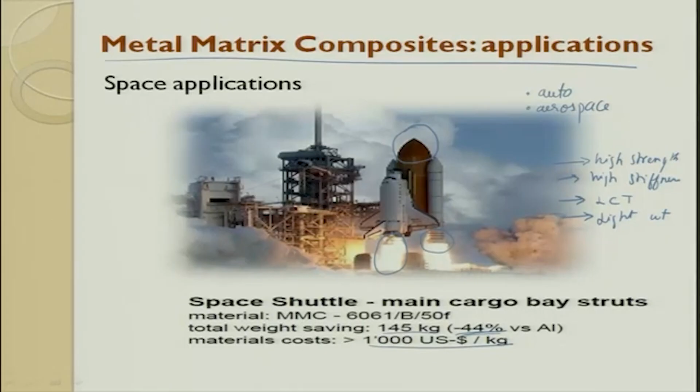Next is the automobile industry. The automobile industry had a huge impact for a common man, because fuel efficiency is one, and then they also try to enhance the stiffness. So the moment the stiffness enhances, during an accident or crash, these materials try to yield and transfer energy such that the passenger is slightly safe.

So the brake drum is made out of metal matrix composite. Earlier it was made out of cast iron, now it is made out of metal matrix composite. Wheel rim: titanium rims are coming up today with metal matrix composite, and then you have the piston, which has been there for a long time, made out of metal matrix composite. They make it through a process called stir casting, which we will see later among the different processes.

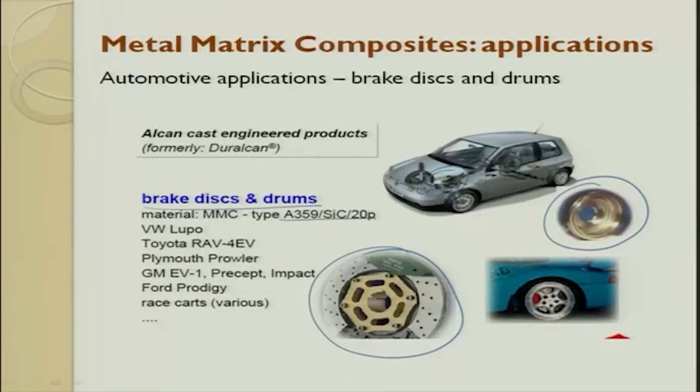So basically if you can make a casting from a metal alloy, then all these things can also be made through metal matrix composites. So brake drum and brake disc was a big advantage. There we used aluminum reinforced with SiC particles. This is used in the Toyota car company, and all the major giants started pushing very hard. So the engine is now made lighter, the silencer is made lighter. Silencers are made today out of titanium alloys, and these titanium alloys now move towards titanium composites.

The other thing is, you can see the front and rear discs. These discs are completely made out of metal matrix composite, and they are all made out of aluminum. So this is aluminum alloy, aluminum, Si and Mg. This is an alloy which we have reinforced with SiC, and it is particulate.

So the moment they do this, the disc temperature enhances. The moment the disc temperature enhances, the efficiency of braking enhances. The car weight is nowadays also reduced. The moment you reduce the car weight, the mileage goes high. Because of carbon footprint and other things, people are looking for less pollution, longer distance of travel, and safer travel.

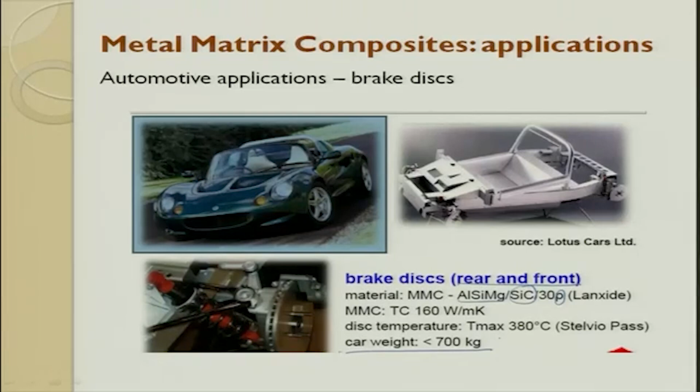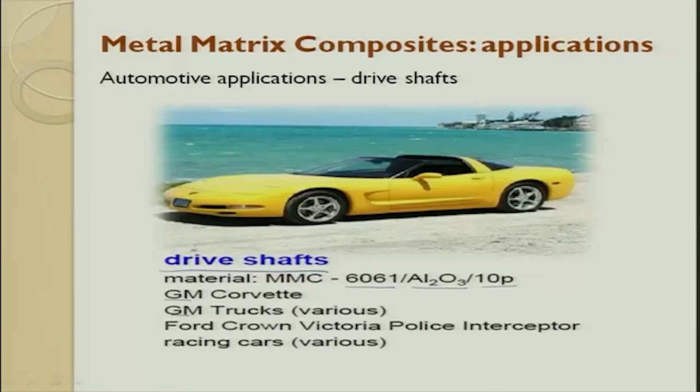So that is why composites are coming up in a very big way, and wherever there is high temperature, wherever a strength point of view or a thermal point of view comes, we replace it with metal matrix composite. Drive shafts are another big example made today out of metal matrix composite. 6061 is the alloy, reinforced with alumina particulates, and this is used by different companies; GM, Ford, all are using it for their drive shafts.

So, engine parts. This is an engine block which was earlier made out of cast iron; from there it went into aluminium. Today people are making it out of titanium, and from aluminium and titanium they are slowly getting into metal matrix composites. Here aluminium reinforced with SiC is done, aluminium reinforced with alumina is done, Ti with TiCN and TiN are also tried. They also try to reinforce with particulates or even short fibers.

The only difference is aspect ratio, length by diameter. A short fiber will have a shorter length, a long fiber a longer length. You can also try to reinforce with whiskers. So if you see here, the rest of the portion will be made out of aluminium alloy, and only the top portion will be made out of metal matrix composite.

This portion alone will be made out of metal matrix composite, wherein ceramics is reinforced. With the ceramics, they make something like a preform, and in the preform there are a lot of vent holes, or some gaps in between. Through these gaps the aluminium is pushed inside. We will see the process. When you study the process in depth, you will understand how these applications have been made.

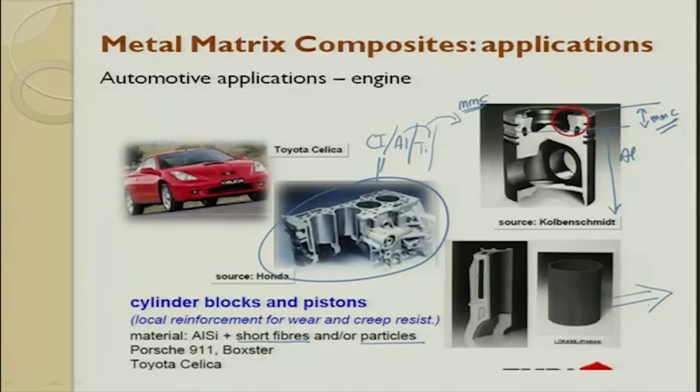This is done by squeeze casting methods. These are liners which are used. They are also made out of metal matrix composite. All the big giants, GM, Toyota, Honda, are trying to replace with metal matrix composites.

Train. In trains also, today the number of coaches has increased from 16 coaches to 24 coaches, at least in India. They are all 21 to 24 coaches, and goods trains take 50 coaches. So the biggest problem is the braking system. The moment you apply the brake, it has so much momentum, it keeps pulling for almost a kilometer and then stops.

So if you want instant braking, and discs which can withstand very high temperatures, then metal matrix composites are tried there. Braking discs and braking drums are today made out of metal matrix composite. They are made lightweight so that they can increase the mileage, and they can withstand high temperatures.

The weight of the disc is 74 kilos, which replaced cast iron. They got a weight reduction of 40%. So the total weight saving is 10 tons for a train. On successful testing, they could go over 1 million kilometers.

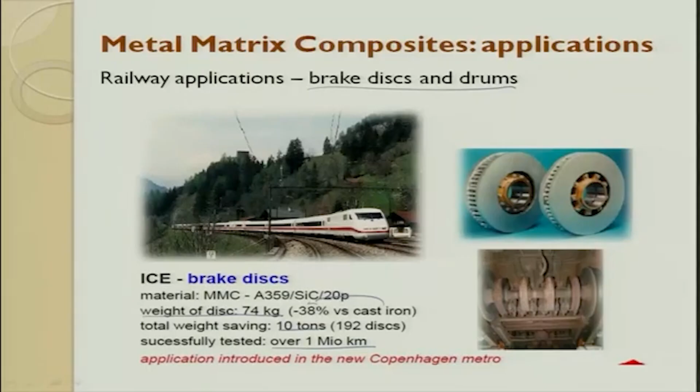In trains, railway coaches and railway engines, they are making copper based composites to withstand high temperature. Circuit breakers, which were earlier bimetallic, are now made out of copper alloys, and discs made out of aluminium are also made out of copper reinforced with graphite so that they give lubrication. All these things are now tried in a big way.

When you go to planes, wherever it was possible, 50% of the parts are now made out of metal matrix composite. They are made out of aluminium metal matrix, titanium, steel and others. These are the applications. Where do we go for titanium? Wherever you want weight reduction. But what is the biggest challenge? Why are people not going exclusively for titanium cast compared to aluminium?

Processing of titanium is difficult. Mixing titanium alloy with particulate composite without having a reaction is a big challenge, whereas with aluminium it is very easy. That is why people prefer aluminium, since its processing is easy. So aluminium is used as well as titanium. Titanium processing is a little difficult.

So if you see, at all the exits you see titanium, because at high temperature titanium is used. Wherever there is not much load, but you still need some strength, you see aluminium. These are some of the places where aluminium is used in a plane, and you can see steel is still used even now, and other composites.

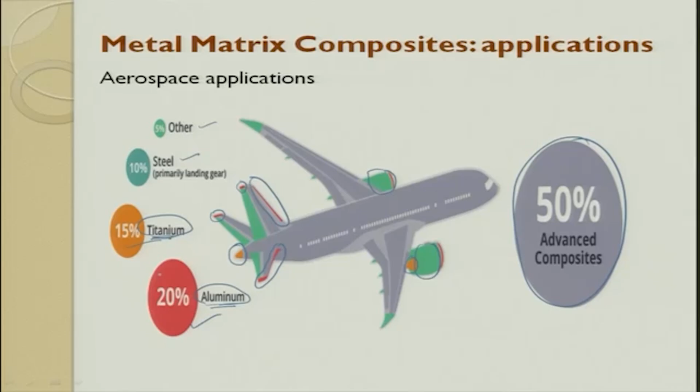Wherever there is hot exit air, they always go for titanium alloys or titanium metal matrix composites. When I say others, these are rare types of metal matrix composites which are used for particular applications. So in the aerospace industry it is also used.

Lightweight, that is why people are making it. Interestingly, whatever casting you made earlier, the same process can be used, but keep in mind that you are adding to the alloy some reinforcement which is lighter weight, so there will be a difference in density. Make sure it is homogeneously distributed, or if you want functionally graded, that is also possible. Functionally graded means the property changes with respect to distance.

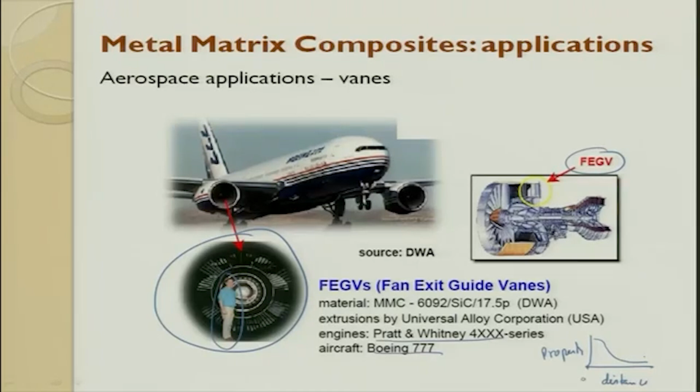So here you see the manufacturer I have given clearly, and what are the candidate components, and then what are the benefits we get. You see weight savings, and higher operating temperature you always get.

Same way with advanced fighters, you can see the life cycle cost savings. You reduce the weight of the component and start saving fuel, and try to find out a break even, when you get back whatever investment you have made. That is what life cycle cost savings means, and you can see it in gas turbine engines in a big way.

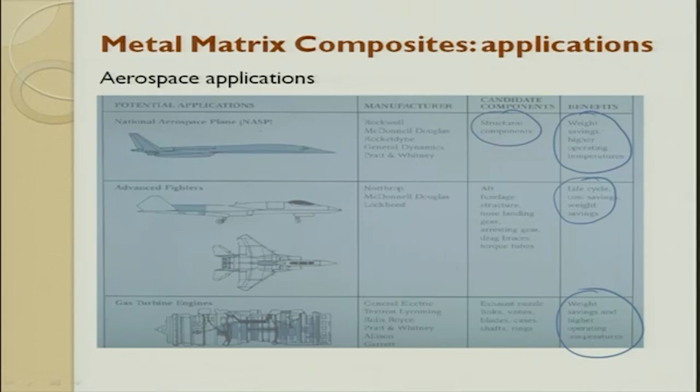So the weight savings, and you can go for higher temperature. When you can go for higher operating temperatures, you have better combustion happening.

This is pretty interesting. These are electrical conducting cables for power transmission, which I introduced in the previous class. If you see, there are a number of small wires tied inside, and then they put a sleeve on top of it. These are transmission towers and wires which run for several kilometers.

In order to avoid the wire getting sagged, we support it at several points. Each supporting point is made out of a tower, which is a huge investment cost. It occupies land and a huge investment to make these structures, and whenever there is a natural disaster, these structures are prone to failure, and relaying them back takes a lot of time. That is why people have nowadays gone for underground cables.

They are not going for overhanging cables, they are all going for underground cables. So that has its plus and minus.

Coming to this cable, initially these cables were made out of conducting material like copper, aluminum and other things, but they figured out that as the load on these, meaning the drawing power, goes higher and higher, these materials start sagging. In order to avoid this sagging, you have to add more and more towers.

Now, with the coming of metal matrix composites made out of aluminum, the density went down drastically, the coefficient of expansion went down drastically, the conductivity enhanced significantly, and now the number of towers are reduced and they have transmission of power with lesser losses, which is a big boon for the power transmission industry.

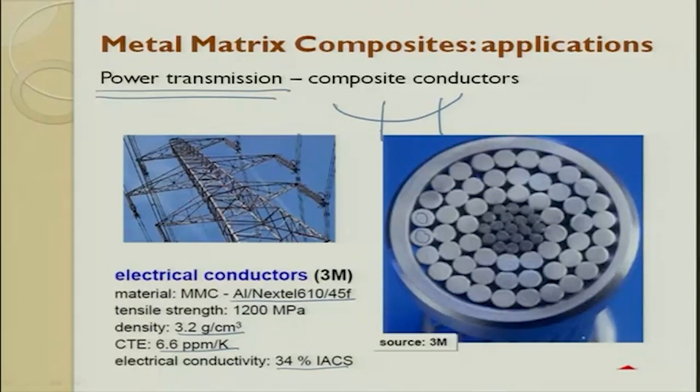Gas turbines can be used in aerospace, and in the marine industry. I have already dealt with these. The advantages are: high strength, low weight, ability to perform at high temperature, which make metal matrix composite the material of choice for gas turbine engine components.

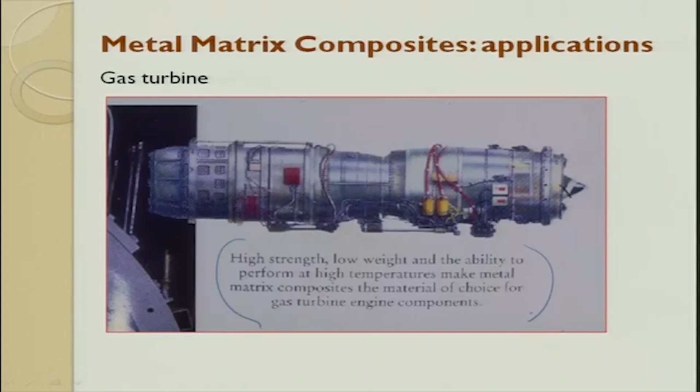If you see the market forecasts, in ground transportation which earlier was 1,600 tons, it has gone up to 3,400 tons. Thermal management went from 668 to 1000, and aerospace and defense increased as well. Industrial and recreation went from 152 to 220. In 1999, 2.5 million kilos were used, and in 2004 it has gone to 4.9, and by 2014 it has increased further.

So now they are finding a lot of applications for metal matrix composites in the transportation industry, predominantly for thermal management.

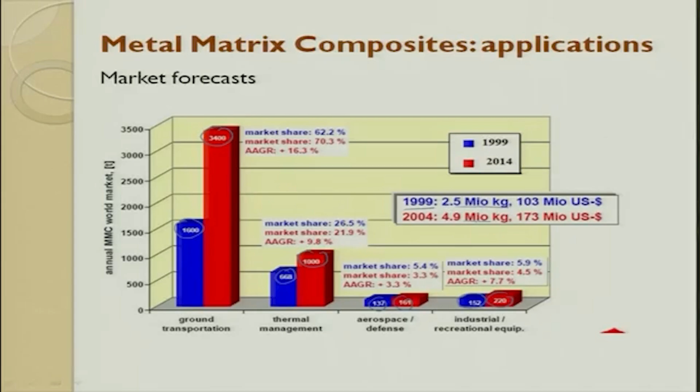With this we come to an end of the lecture, wherein we have seen a lot of applications, and we have seen the introduction of metal matrix composites. I have given enough basic knowledge for you to appreciate metal matrix composites.

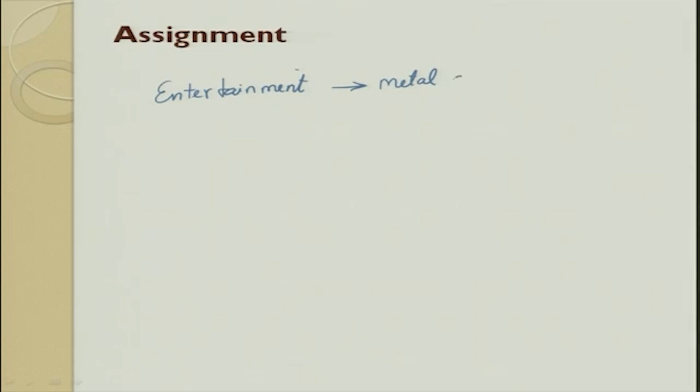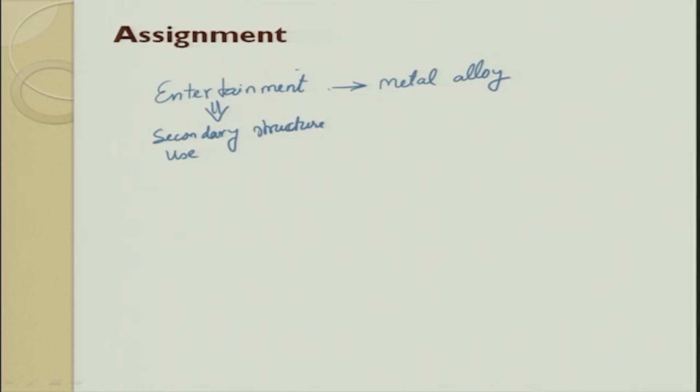I would like to give an assignment. Try to look at any entertainment industry, and see where all they have used metal alloy. People might ask, what is entertainment industry, where there are secondary structure usages. There are a lot of secondary structure uses. So wherever there is metal alloy, can you replace this metal alloy by composites?

If so, what are the components? What are the components? Just try to make a list for yourself, and then try to see whether it is worth making it. Keep in mind cost.

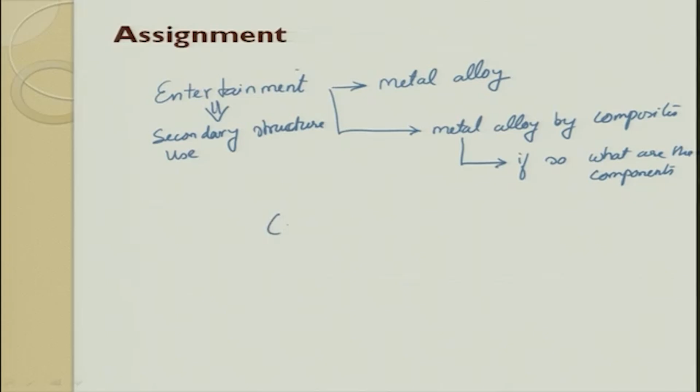Cost is a major factor. Keep this in mind, and look at all the entertainment parts, entertainment compounds, and see where metal alloys are used. Can these metal alloys be replaced by composites, and if so, what are the components you will do? Keep cost as a major consideration, that is very important, and try to make a list.

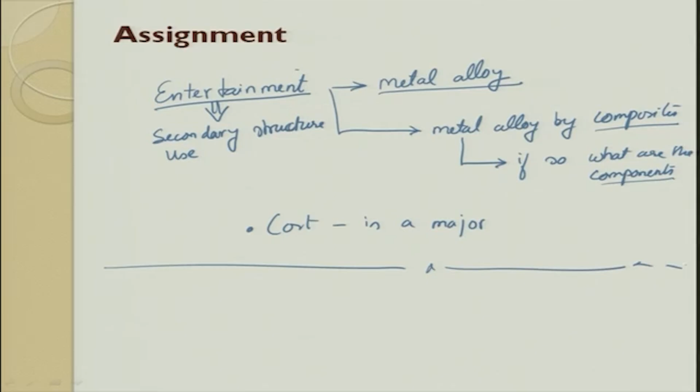With this you try to do it, and you do not have to submit it. Try to have an assessment for yourself, and if you cannot find live examples, you can use the internet and start browsing to understand how people decide whether an alloy has to be changed into metal matrix composite. Thank you.